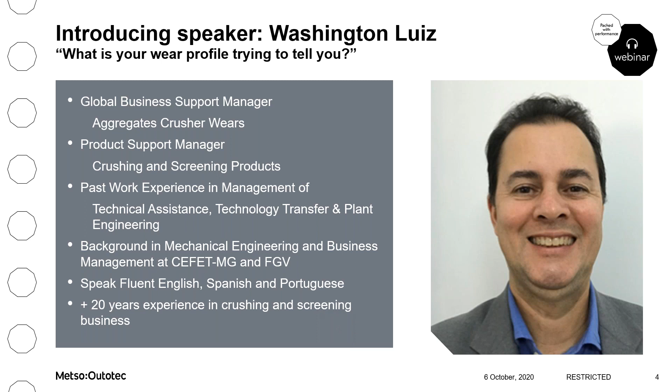Hello, everybody. Good morning to some of you and good afternoon to others. We are here today to talk about what the crusher wears are telling you. This is an important point, as this is the material through which the stones and minerals pass through the machines, giving the performance, shape and quality of the final product. So before we start, let's talk about safety.

At Metso Outotec, we always start by speaking about safety. This comes first always, so taking care is our common mission. We are committed to taking responsibility for our own safety and for the safety of others, whenever visiting a customer site or in our facilities. COVID-19 has had an impact on our markets, and in this difficult situation we are doing our best to support our customers. We believe that all accidents can be prevented, so zero injuries is our long-term target.

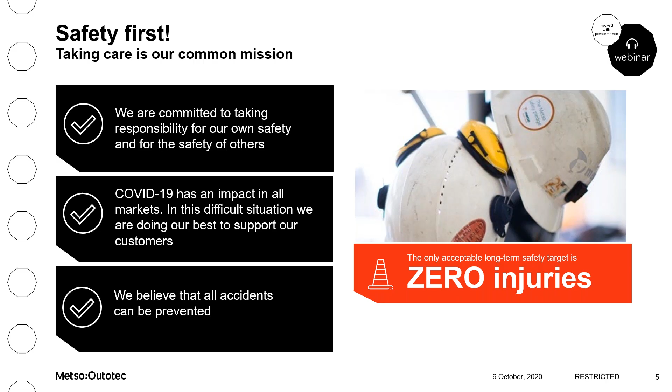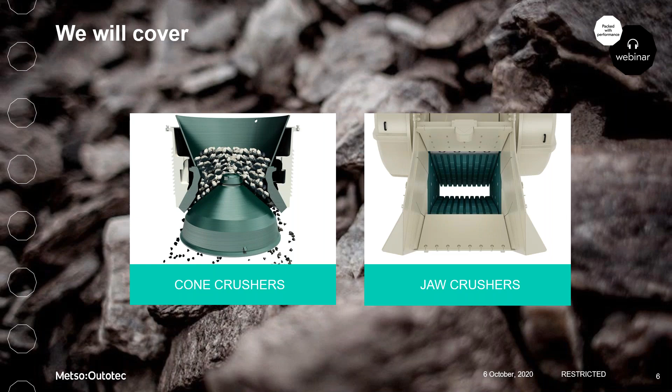We will cover here two kinds of crushers, as they are mainly found in aggregate producers: cone crushers and jaw crushers. They are very common to be found in many quarries or contractors' plants. Let's start with the cone crusher.

A little bit of introduction. Maybe many of you already know these terms that we use when we talk about the bowl liner and mantle, the main components of wear parts on a cone crusher. Then we have the CSS, which we call closed side setting, which is the adjustment of the machine, the minimum measurement when the rocks are passing through the crushers.

They have to pass this aperture, and this is the minimum, where we calibrate the final product. Feed opening is the maximum opening where the material enters the crushing chamber. And nip angle is also one of the most important measurements we have in a cone crusher.

This is usually calculated by our engineers, and it's very important when dealing with stones that have very low crushability. This means, for example, river stones, and also basalt or diabase, materials that many times jump in the chamber and keep bouncing there like boiling. So nip angle is the most important parameter to keep the performance of the crusher when we have this kind of material being crushed.

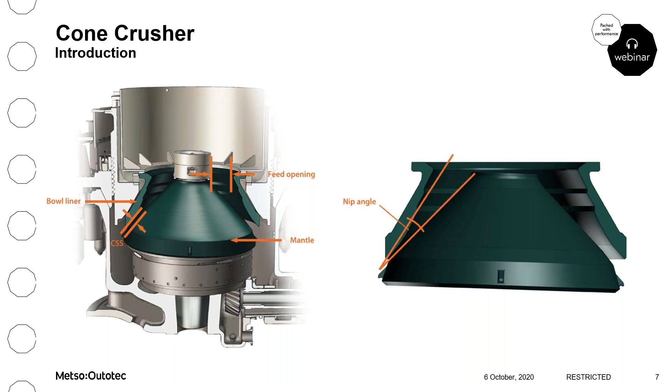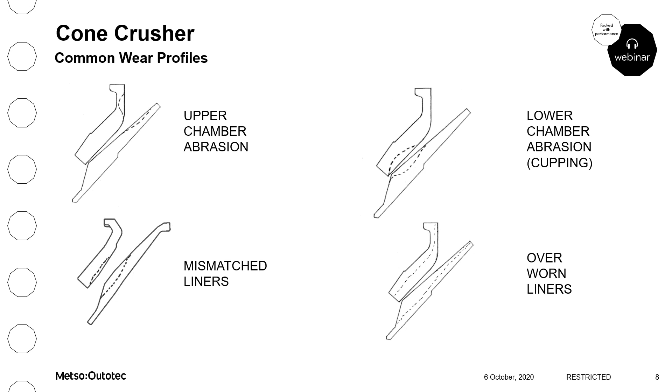When talking about wear for the cone crusher, we have 4 main different kinds of wear. The first one, on the left upper side, is upper chamber abrasion, which happens on the top of the crushing chamber. Then we have the one that happens in the lower part of the crushing chamber. We also have mismatched liners and overworn liners. The overworn liners is the most common one we find in crushing plants, for many reasons.

So, high wear towards the top of the chamber. Let's talk about each one of them. This usually happens due to a feed that is too large for the crushing chamber, so the material stays on top, bouncing or boiling, and wears out this region.

So we get boiling feed at the top of the chamber and difficulty with slippery feed. Possible consequences: poor utilization, short lifetime, decreased capacity, and increased probability of catastrophic failure. Why decreased capacity? Because the material stays there and blocks flow from the top and through the chamber. It stays there boiling and does not go down, for some time, which is why the capacity drops a lot.

Many times capacity drops 20%, and sometimes in a really difficult situation, if the nip angle is not good, the closed side setting is too tight, and the chamber is not correct, production can drop 50%. So this is a very important thing to take care of.

Solution: slowing down the speed, when we talk about HP crushers where we have this possibility. Decreasing the feed top size is the most important one. So, closing the previous crusher, whether it's a secondary cone crusher or the primary jaw crusher, down as necessary, so we can calibrate the material going to be crushed by this specific stage.

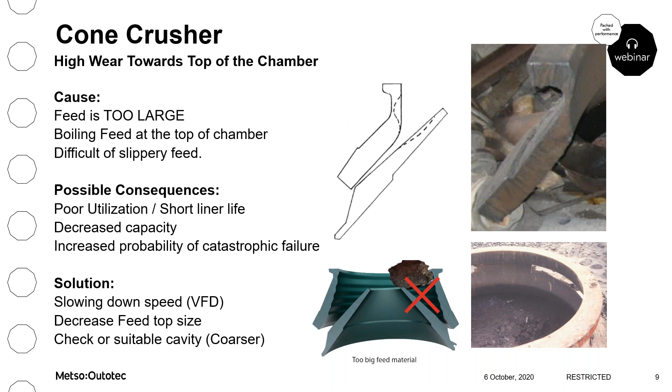At this point we can check it out and adapt the machine to what is needed. So, available options to solve this problem can be to create a step, or do a proper selection of the chamber.

Another option would be to add a retard bar. This is not very common to be done, but in some specific cases we can do it. And another option is also adding a step.

So if we're starting up the machine and it's really necessary to act quickly, it's possible to machine the top area of the crushing chamber and then have a proper profile. Or, if we have it in stock at the distributor or at the Metso distribution center, it's easy to send to the end customer and do the replacement.

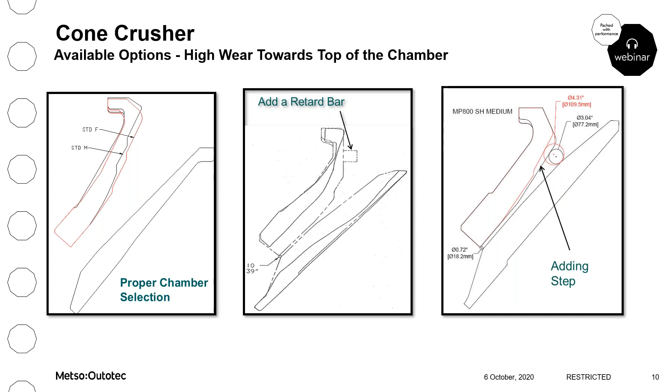Lower chamber abrasion - we sometimes call it cupping, because it creates a depression at the lower part of the mantle where material flowing from the top sometimes stops, or fines accumulate in this area. So we call it cupping.

The cause of this: too many fines in the feed, not feeding enough material, crushing only on a certain level of the chamber, and single particle size feed. This means particle size that gets crushed just in that specific region, so the manganese wears out there and creates this cupping.

Possible consequences: packing. Packing means the crusher can start to bounce - the adjustment ring starts to move and bounce, and you can hear a lot of noise. This is one big problem. It means the forces are too high.

This increases the crushing pressure on the cylinders and hydraulic cylinders, also creating bouncing on the adjustment ring. It decreases capacity because the material doesn't flow well in the crushing chamber - it stays there longer, so capacity can drop a lot, 20, 30%, or sometimes more. And there's ring bounce, as I said, and decreased liner life, since you have to take it out with a lot of manganese remaining at the bottom of the mantle and on the bowl liner as well.

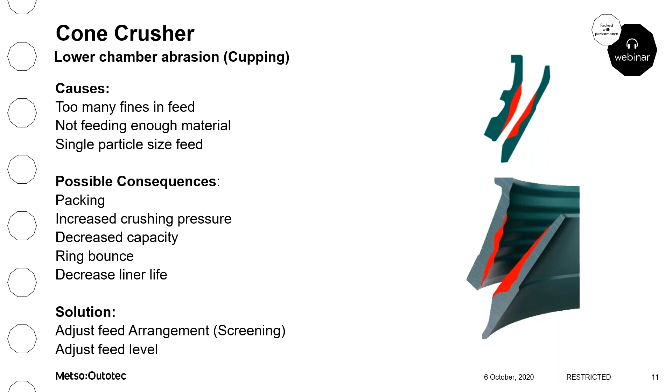Then we have this other situation that can happen, which is mismatched liners. It happens when we have a different bowl liner profile compared to the mantle. For example, we have a standard medium bowl liner working with a short head mantle. Then you have a mismatch, and they do not work perfectly. You have the mantle with a wear profile just in a certain region, because the bowl liner is pressuring the material there, and then you don't have proper and full liner wearing in the full length.

Solution: make sure that liners are designed to be used together. And be careful also using suppliers other than Metso Outotec liners for Metso Outotec machines, as they can in some situations not have the proper design and proper dimensions to work as they should.

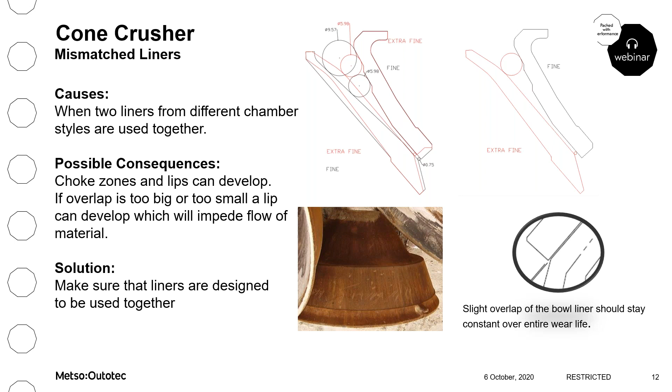So causes: poorly distributed feed, non-homogeneous casting. It can also be if it's not well produced. Possible consequences: ring bounce, because of a lot of pressure in a certain region of the crushing chamber, poor particle shape, uneven liner wear, and imbalance of crushing forces.

Why poor particle shape? Because if you have segregation or the distribution is not good, what happens is you have too much coarse material on one side, so you don't have the fines between them that create this crushing between stone. So it will be creating slabby material, and also you won't have a very good shape at the end of the day.

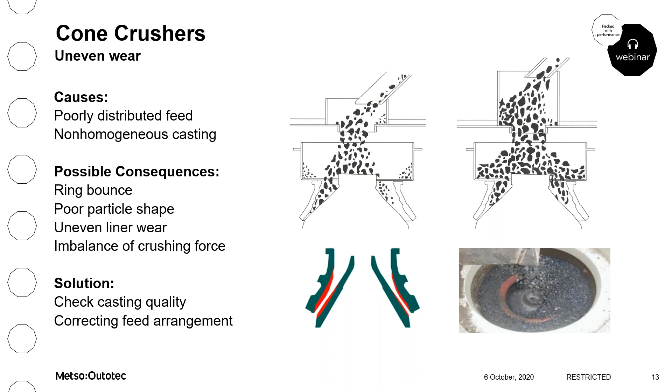Overworn liners - as I said, this is the most common situation that we find on the customer side. Failure to monitor liner wear means they forgot to monitor it, or they monitor it one day and not the next. So it can be that it's worn out and should already be replaced, but it's still operating.

Stretching liner life means sometimes the customer needs to keep producing to fulfill a certain contract with their end customer, and then they keep producing. And at the end you have this situation, so there are many consequences, like liners could come loose and damage the machine. Seating surfaces can be damaged or worn out on the mantle, bowl liner, or bowl itself, the two frames of the crusher. And liners crack and break apart.

It can happen also that when they break apart, they go into the crushing chamber like an uncrushable material, like tramp material, and you can burn bushings or break bearings or even break a part of the main frame. So be careful about this and calculate well the damage that you are going to cause, and whether it's really worth it to pay that bill just to produce more material for your contract.

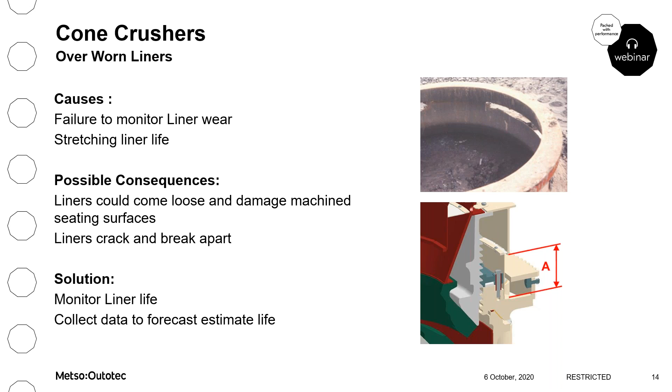That is usually 50%. So correct chamber for feed size. It means that you have chosen the correct chamber for the feed size of material. Good feed grading means that material is going all around the chamber, and you have material that is mixed inside, not only coarse or not only fine material, but a mixed material that is being crushed all together.

And the consistent power draw numbers, that means that you have a power draw without a big variation. So for example, if you have 500, it means that it's keeping between 490 and 510 all the time, and you don't have a big variation.

And correct metallurgy also helps to make this. It means the manganese is good outside and inside, not only on the surface. It's good on all the thickness, so heat treatment was done well. The manganese recipe is good, so the alloy and components is perfect. So you can get this very nice wear profile.

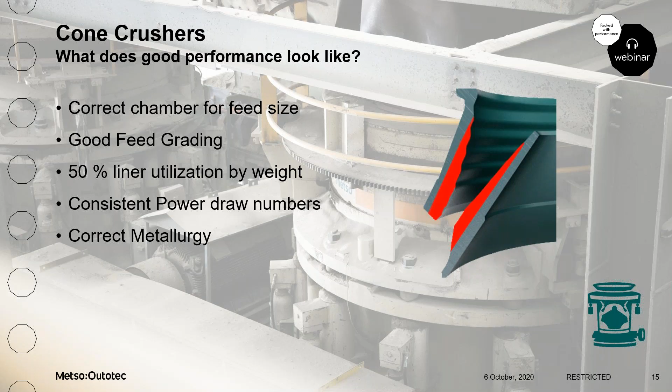So it always has a financial impact. If you don't have the proper selection and proper wear liners, you can have a financial impact, and it's easy to calculate. I believe you have two main components to calculate. One is the number of changeouts, and the second is how much capacity you lose when you don't use the proper wear liner.

So you have to collect the key operational parameters. For this specific case, this example that we have, you have standard fine liners that was later on replaced by standard medium. The setting is 16 millimeters, it was kept the same, and lifetime was 150 hours, it was raised to 270 hours. Just with this change or replacement to install the proper chamber profile.

So results: when we do this, we could get 12 less changeouts per year. It means less cost because you have less labor, you have less risk of accident because people have to be around the machine, have to lift parts, have to tighten, have to use many kinds of different tools and do some preparations. So there is a risk. There are many machines and tooling involved, and lifting tools and so on. So there is a cost, a direct savings.

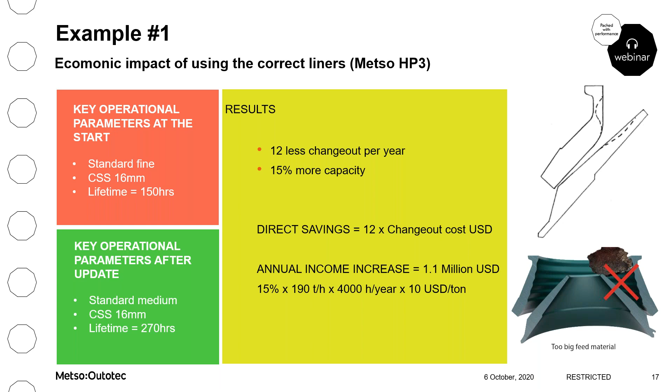Now let's talk about the jaw crushers that are also a very much important part of this crushing process. The jaw crushers prepare the material for the secondary application for the cone crushers. So you need to take very good care of it, and also choose the right profiles in a way that it's going to not only give the right calibration for the material going ahead, but also give the proper shape for the material and improve, avoiding slabs, helping the cone crusher to produce and giving the proper quality of the end product.

Some basic concepts to the jaw crushers as well. Feed opening is the depth of the cavity, and usually the maximum feed size is approximately 80% of the feed opening. And CSS, that is the closed side setting, is the adjustment of the crusher, and many customers prefer to use the OSS, that is the open side setting. So when they use this, they have to use a special table that we have in our instruction manual to convert it into the CSS. That is the number that we use in our production graphics and table as well on the product catalog.

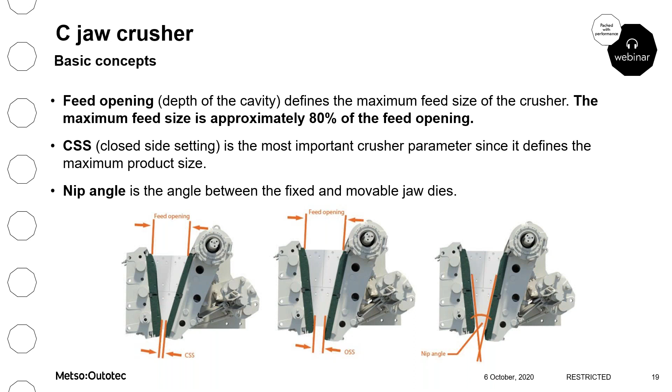Again, it helps a lot. If you don't have the proper nip angle, you can lose capacity up to 50% and sometimes more. So take care of this and ask your Metso contact to talk with a specialist if you feel this should be reviewed in your crusher.

To get optimum capacity and maximum lifetime of wear parts, check the feed size. What is coming from the pit, from the quarry? Sometimes in the blasting process, the mesh is too open or wide, so the material size is too big, and you have to stop a lot to remove boulders, take them back to the quarry to blast, or calibrate with the excavator. That takes a lot of time. So be careful with the blasting process to maximize capacity and avoid this problem at the primary.

Check the feed arrangement. The feed must be distributed evenly across the chamber, and the crusher cavity should be full - not overfull, not above the feed level, but at least at the chamber level, above 70% up to 100% of the feed level. This helps capacity a lot because the material presses the lower material down, making it easier for the jaw dies to grip the stones.

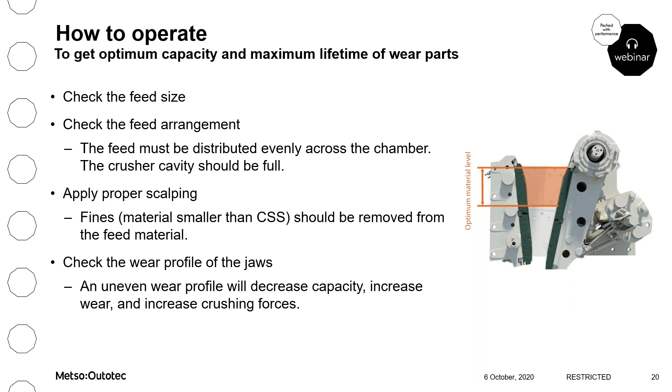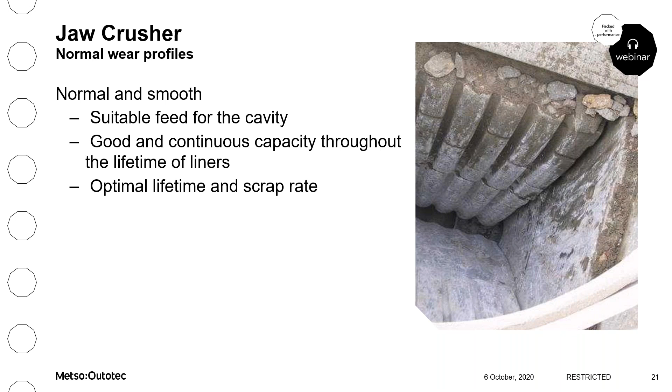So, how does normal wear look like? This is how it looks - from the top down, it's very even, not deep, with no valley on the jaw dies. Normal and smooth wear means suitable feed for the cavity, good and continuous capacity throughout the lifetime of the liners, and optimal lifetime and scrap rate. Those are the characteristics of a very good wear profile.

When it's worn from the top, it means it was rotated too late - you started the operation but didn't rotate the jaw die at the proper time. It becomes very thin at one corner, at one end, making proper operation difficult. A large nip angle causes rocks to bounce, reducing capacity. This means the rocks bounce on the top or somewhere, staying there and wearing out the material, which leads to what we see right here.

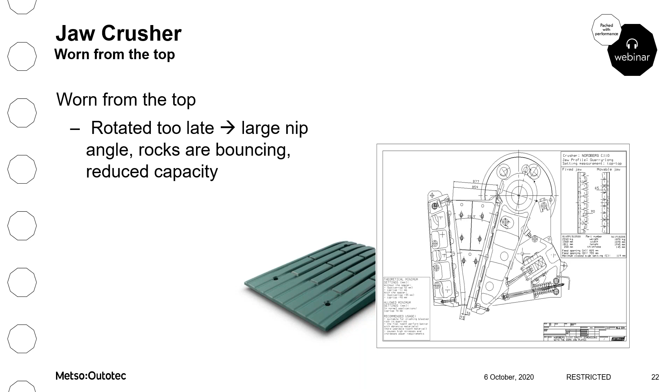Wear profile from the middle. It means that if you have a one-piece jaw, you will lose a lot of manganese because you have to scrap it very soon, and then you have manganese on the ends that was not utilized.

Possible reasons: material is dropping to this point from the feeder. Check the dropping height and the velocity of feed material. You can also have one size of feed, meaning a very specific gradation coming from the quarry, or it was selected some time ago in the quarry pit and now they are sending all of them to the primary crushing plant. Then you have this specific point being worn out. It could also be cavity design—you're not using the proper crushing chamber for that application.

Possibility for poor lifetime and capacity if cupping from the middle. You'll have some material stopping at this part when the cupping is very deep. You have this worn out very deep, so the flow of material will not be adequate, and the speed is going to be much lower, stopping at the middle, which decreases the capacity. So usually you can lose 10–20% of the capacity very easily when it happens this way.

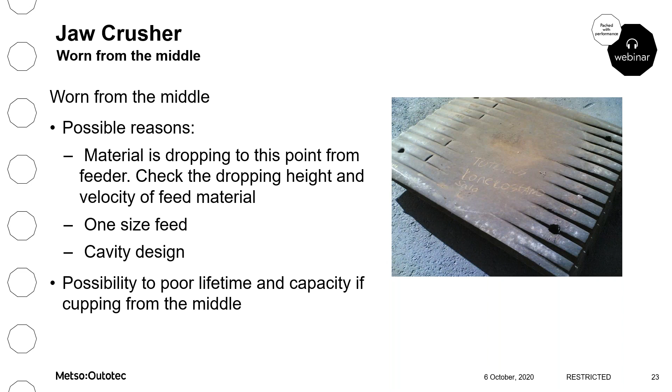So, wear from the bottom. This is another profile, and you can easily see it when you go to visit the scrapyard of the customer site. Sometimes you can even go deep on the bolts, and if it goes deep also on the seating surface behind the jaw die, you start to wear out the pitman or the front mainframe. This is bad—you can have the jaw plate not loose, but moving, and then you have a problem on the surfaces of the structures as well.

Possible reasons: small setting, fine feed gradation, cavity design. Many times, if you're not using the proper liner on the jaw crushers or on the secondary crusher, you try to compensate using a very small setting on the jaw crusher, and the consequence is what we can see here. So selecting the proper liners for the secondary also helps the primary jaw crusher.

Sometimes the customer is using this very small setting also to produce the final product from the primary crusher, and then it happens this way. Sometimes, if you calculate and it compensates, it's financially good for you that you're producing only with one crusher that specific product for your customer, so that's okay. But it's not okay for the machine. Take care and do not take very long to replace it with a new one.

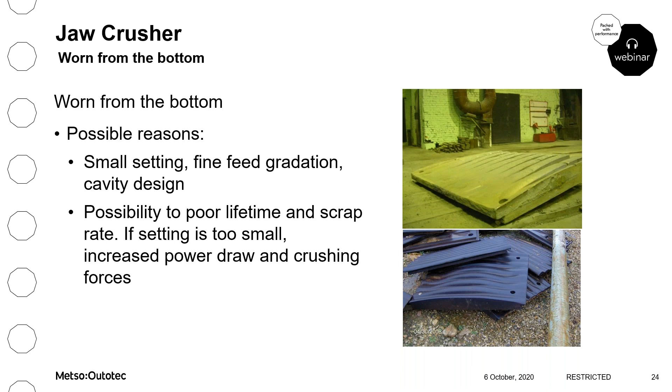Cupping is another characteristic that can happen with the jaw dies. Possible reasons: small setting, fines in the feed. The difference from the lower part of the jaw die wear is that it happens almost at the end of the jaw die, but it creates a deep depression, and that's where the flow starts to stop and you lose a lot of capacity. So small settings can do this: fines in the feed, fine feed gradation, cavity design.

And possibility for low capacity, high power draw, and increased crushing forces—again, almost the same as when you have high wear on the bottom of the jaw dies. As I said, here we can see clearly on the picture below, down in the corner of the right side, that when you visit the customer scrap yard—some customers call it a bone yard—it has a whole story about the crusher.

You can see how it was behaving and how it was being treated, and what the customer's need was. Of course, they do this for a reason, but you can discuss and try to find a solution, whether on the secondary crusher or the primary crusher itself, changing the jaw dies, or maybe in the quarry pit, and try to find a solution together. Discuss and take time in the boneyard, the scrap yard, to find the proper solution for the customer. You will be improving the plant capacity and improving the shape of the end product—meaning the quality of the material they are going to sell, so they can capitalize on this as well.

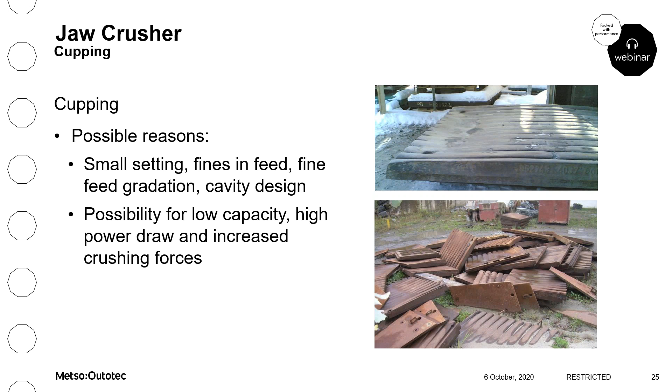This one is very much specific and often related to the maintenance process or quality of the jaw die itself. When the customer is replacing the jaw dies, sometimes they do not tighten the bolts well, or there is dust or material between the jaw die and the structure or the pitman, leaving gaps behind it. They tighten the bolts, it starts to operate, and then suddenly the parts are bent.

It can also happen because the bolts were not retightened. You know that frequently you have to retighten the bolts to keep it, because the manganese parts can have some deformation over the period they operate. After some hours, you have to go and retighten the bolts, and along the process they are also wearing out, having more deformations and reduced thickness in some areas because of the pressure. So it's important to retighten the bolts.

It's easy to check if they are tightened. You look at the instruction manual, you see there is a certain thickness of the washers that has to be there in place, and then just go there, retighten, and you keep it safe.

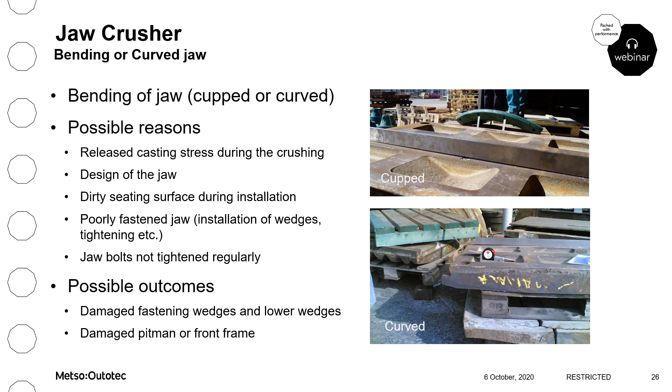Things to find out: when you rotate the jaw die, sometimes if you rotate it too late, it can create a depression at the middle of the crushing chamber if you use the two-piece jaw dies, and this will create a slower flow, because the material will stop in that region and not flow well as it should. The speed is going to be lower, and you can have a capacity decrease.

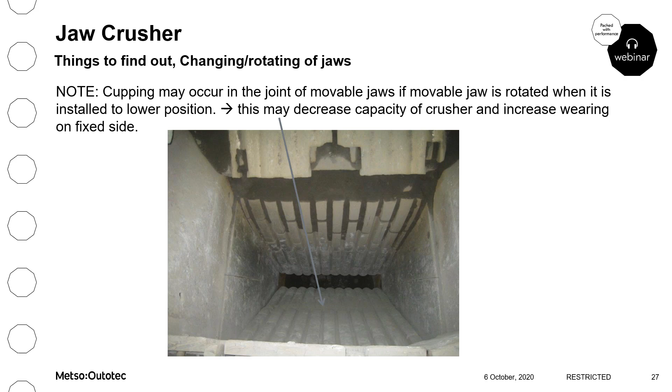So this is all I had to say today. I hope it will add some value to your day-to-day life and your plant capacity, and the way you deal with your customers as well, giving you more information to discuss with them and create value, and also opportunity to do more business. Thank you very much.